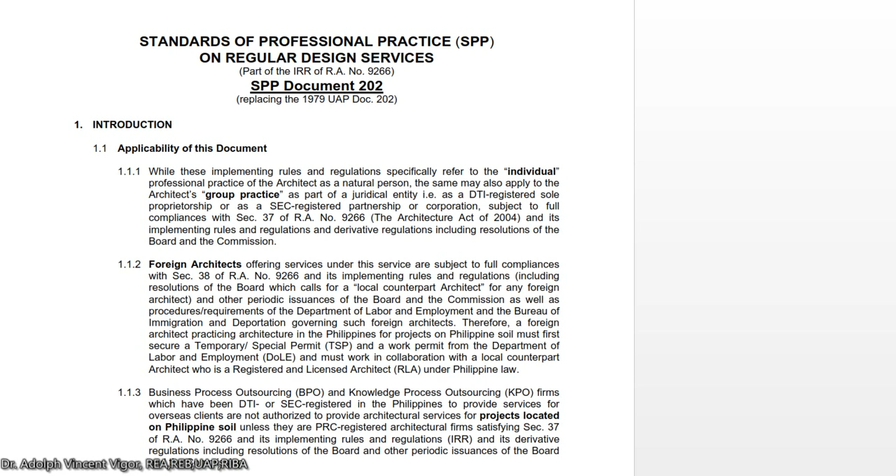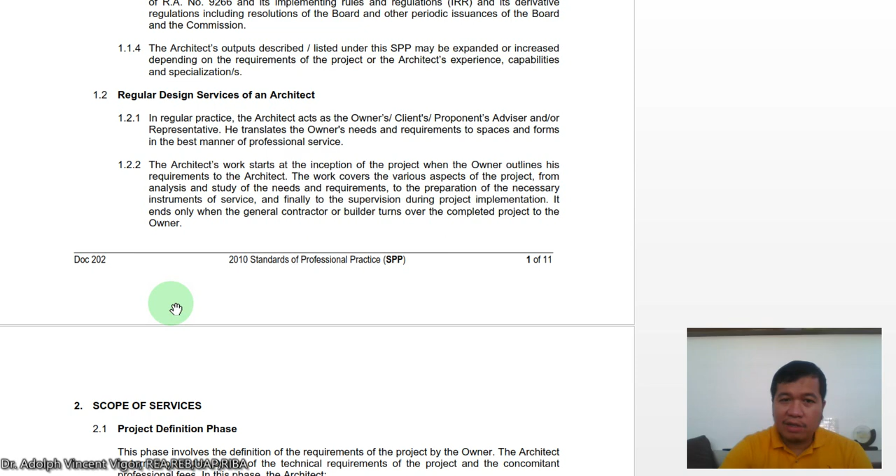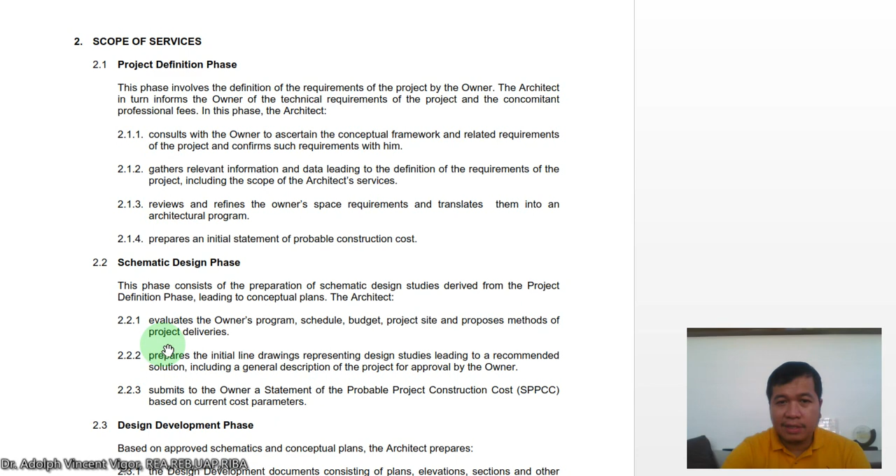Last week we discussed an introduction about SPP Document 202. We talked about the applicability of this document, so the regular design services of an architect, the scope of services, including the project definition phase, schematic design phase, the design development phase, the contract document phase, the bidding or negotiation phase, and the construction phase.

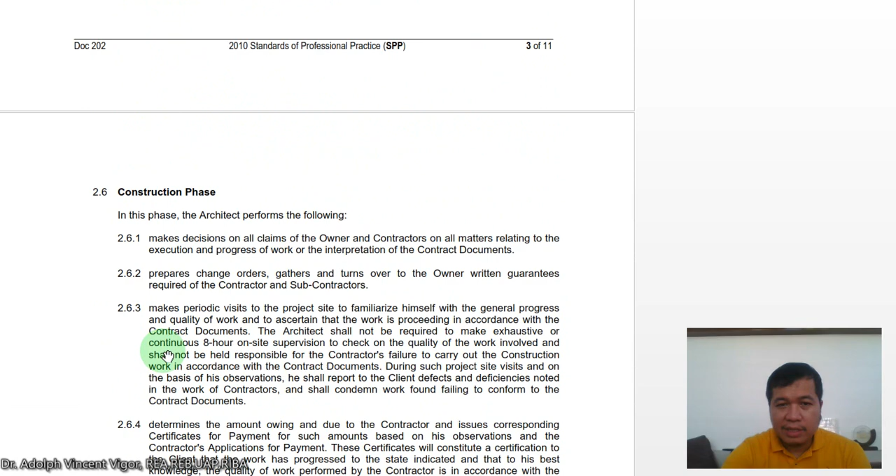Now let's look into the manner of providing services. There are two ways by which an architect may enter into a contract with the owner as the lead professional while working with other professionals in the engineering and allied professions. The first is with a single contract between the architect and the owner, and sub-consultancy contracts between the architect and the other professionals working with the architect.

So this means there's only a single contract between the architect and the owner. Then the architect has sub-consultancy contracts with other professionals that will be working with you. Then we have the architect and the engineering and allied professionals executing separate contracts with the owner.

So let's review. The first way is a single contract only between the architect and the client, but the architect has several contracts with the other allied professions. Another way is that the owner enters into multiple contracts with the architect and different allied professionals in the fields. So in both cases, the professional responsibilities and civil liabilities of each state-regulated professional remain separate.

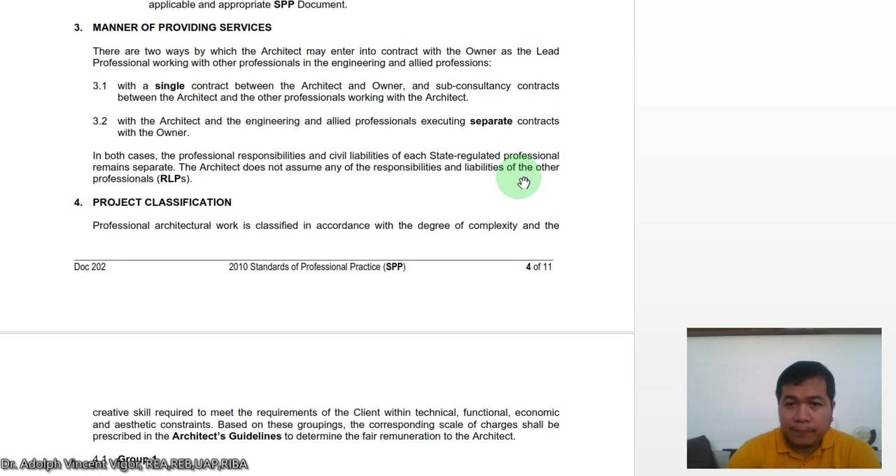Now let's look into project classification. Professional architectural work is classified in accordance with the degree of complexity and the creative skill required to meet the requirements of the client within technical, functional, economic, and aesthetic constraints.

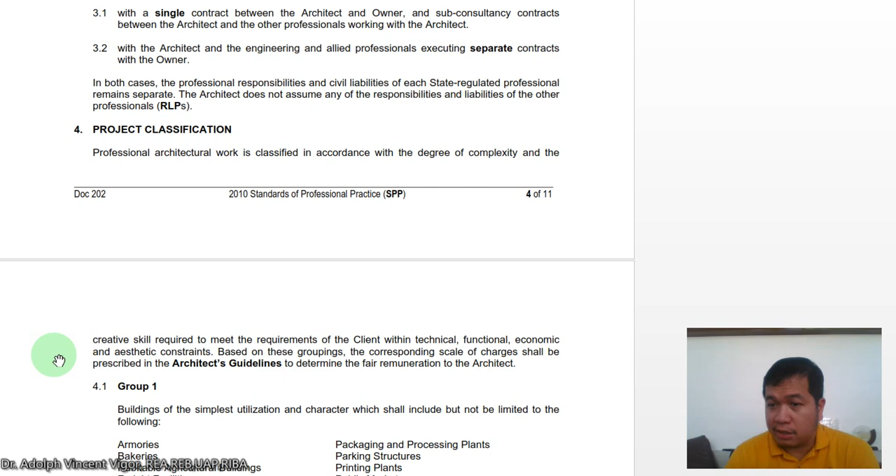Based on these groupings, their corresponding scale of charges shall be prescribed in the architect's guidelines to determine the fair remuneration to the architect. So the keyword here, guys, is fair remuneration. When you think about it, projects are not the same. Some projects could be quite simple, but others could be quite complex and technical in nature. That's why these guidelines were established.

So let's look into group 1, which are the buildings of simplest utilization and character. These are the armories, the bakeries, the habitable agricultural buildings, freight facilities. We also have hangars, industrial buildings, manufacturing or industrial plants, packaging and processing plants, parking structures, printing plants, public markets, service garages, and simple loft-type buildings and warehouses. So these are the classifications here in Group 1.

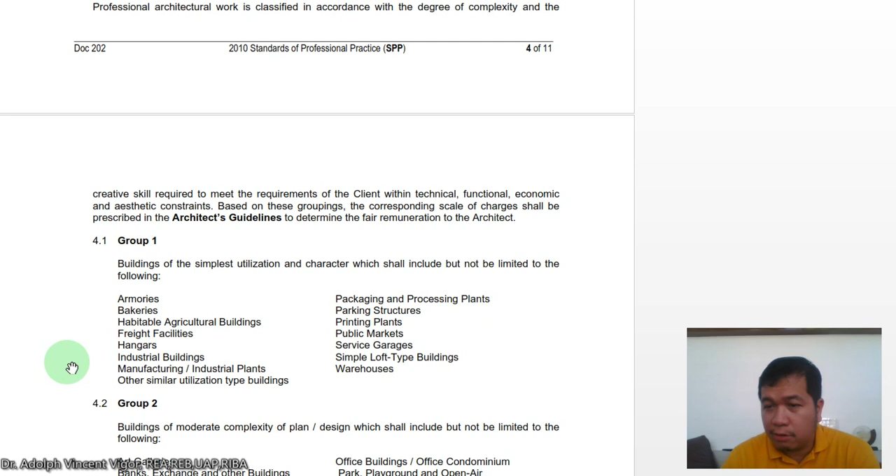It doesn't mean, guys, that manufacturing or industrial plants are simple. It just means that our involvement in this type of structures is just simple, compared probably to the mechanical engineers who will be doing the design of the machineries.

Then we also have here group 2. These are buildings of moderate complexity of plan and design, which include but are not limited to the following: art galleries, banks exchange and other buildings, financial institutions.

Bowladromes, call centers, churches and religious facilities, city town halls and civic centers, college buildings, convents, monasteries, and seminaries, courthouses, halls of justice, dormitories, laundries and cleaning facilities, libraries, malls or mall complexes, motels and apartels, multi-story apartments, nursing homes.

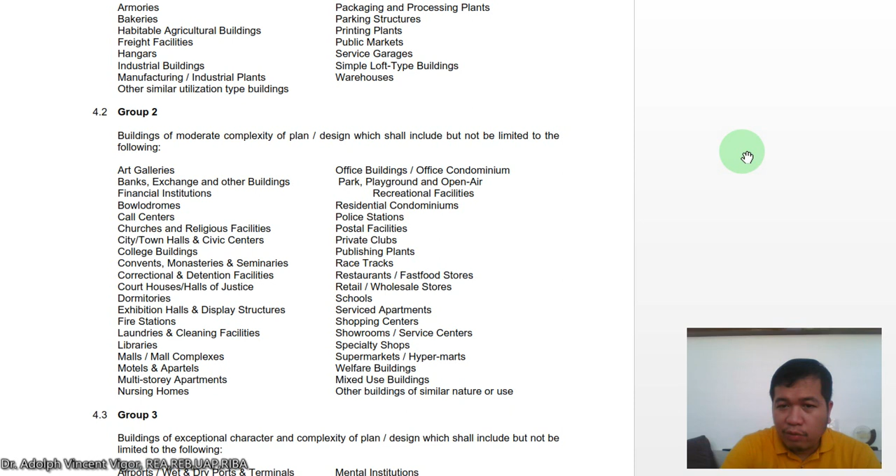We also have office buildings or office condominiums, parks and playgrounds and open-air recreational facilities, residential condominiums, police stations, postal facilities, private clubs, publishing plants, racetracks, restaurants or fast food stores, retail or wholesale stores, schools, service apartments, shopping centers, showrooms or service centers, specialty shops, supermarkets or hypermarts, welfare buildings, mixed-use buildings, or other buildings of similar nature or use.

And we also have Group 3, which is the buildings of exceptional character and complexity of plan or design, which shall include but not be limited to the following. So when you're already talking about buildings of exceptional character, usually these are done by large firms already.

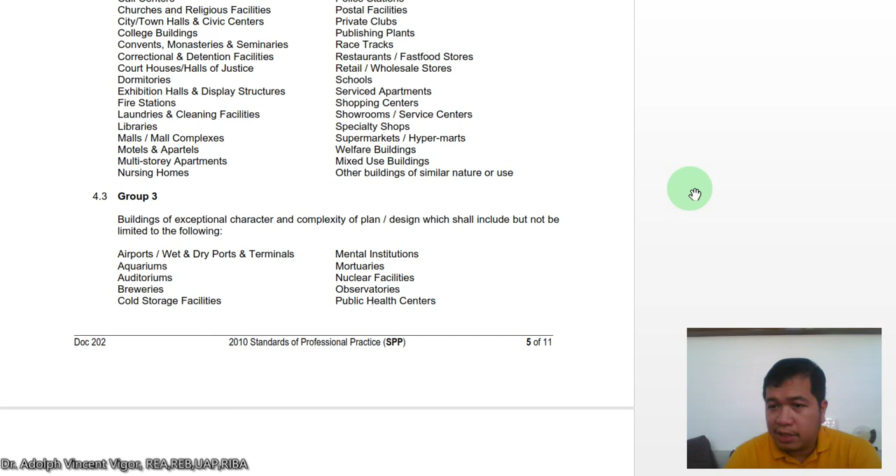So we have airports, wet and dry ports and terminals, aquariums, auditoriums, breweries, cold storage facilities, mental institutions, mortuaries, nuclear facilities, observatories, and public health centers.

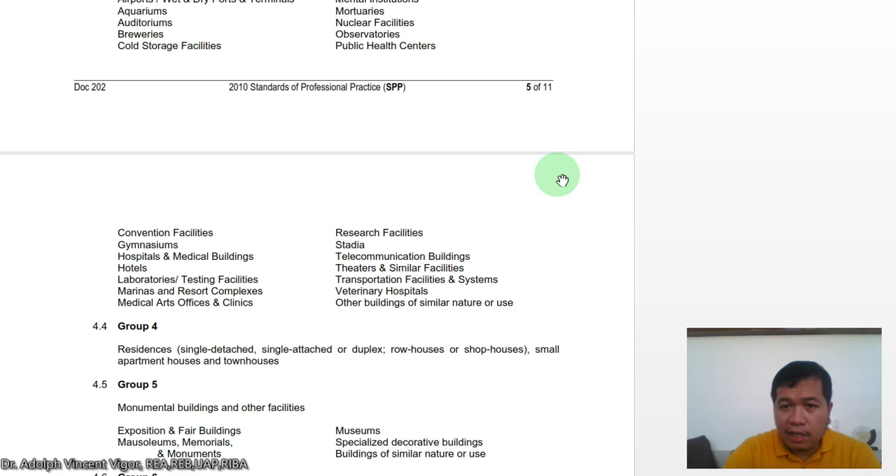We also have convention facilities, gymnasiums, hospitals and medical buildings, hotels, laboratories or testing facilities, marinas and resort complexes, medical arts offices and clinics, research facilities, stadia, telecommunication buildings, theaters and similar facilities, transportation facilities and systems, veterinary hospitals, and other buildings of similar nature or use.

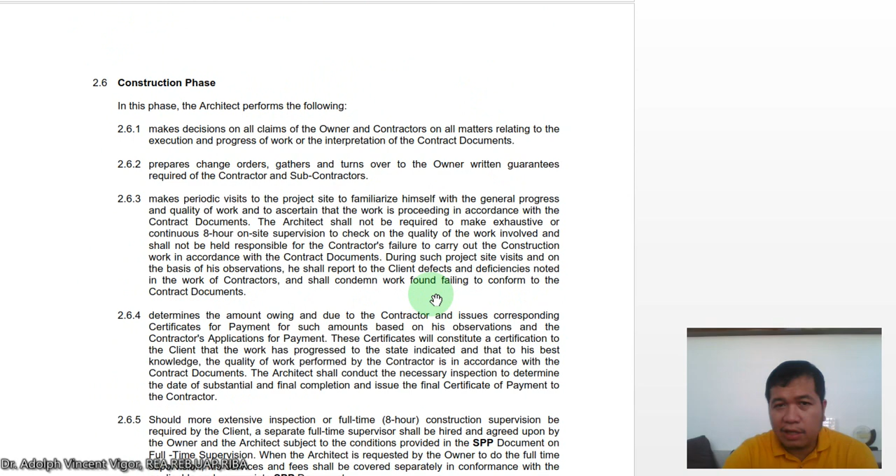So, I think it's easier to familiarize this class if you think about it. When you talk about group 1, it's simple. Group 2, this is the moderate. And group 3, these are the extremely complex projects.

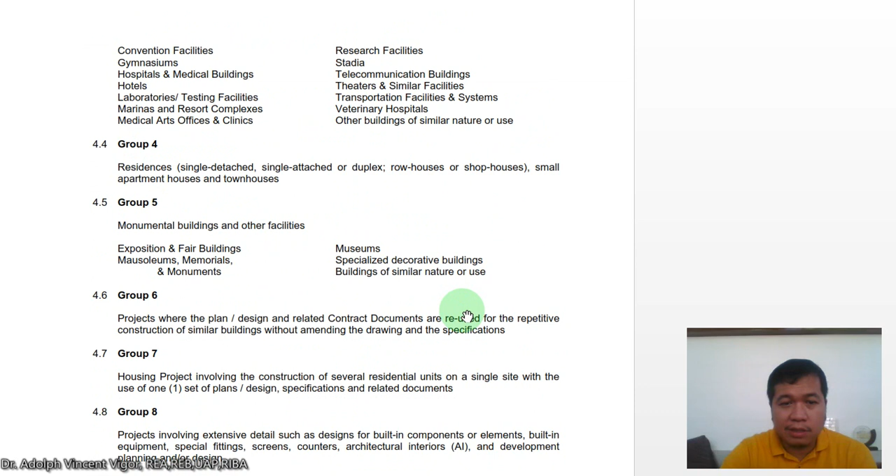Okay, then we go into group 4, these are just the residences. So when you talk about residences, we have the single detached or duplex, row houses or shop houses, small apartment houses and townhouses. Single detached meaning the house is not connected to a firewall. And you have here duplex, row houses, or shop houses.

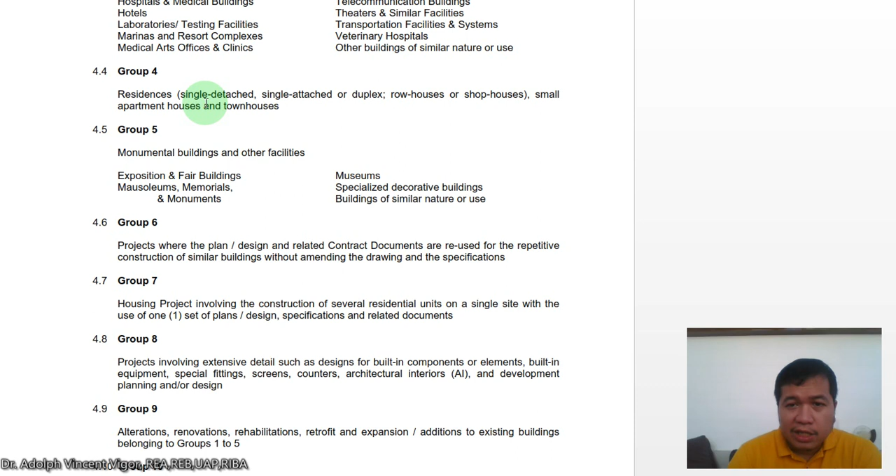So these are the residences. Then we have here group 5, which are the monumental buildings and other facilities. So these are expositions and fair buildings, mausoleums, memorials and monuments, museums, specialized decorative buildings, buildings of similar nature or use.

Then we have here group 6. Group 6 is projects where the plan, design, and related contract documents are re-used for the repetitive construction of similar buildings without amending the drawing and the specifications. So it's just a repeat. The keyword there is that the building is going to be built repeatedly.

Then we have here group 7. Group 7 are housing projects, which involve the construction of several residential units on a single site with the use of one set of plans, design specifications, and related documents. The keyword here is it just uses one set of plans already for the entire drawings for the houses.

Then we have group 8. These are projects which involve extensive details such as design for built-in components or elements, built-in equipment, special fittings, screens, counters, architectural interiors, and development planning and or design.

Then group 9, alterations, renovations, rehabilitations, retrofit and expansion and additions to existing buildings belonging to groups 1 to 5.

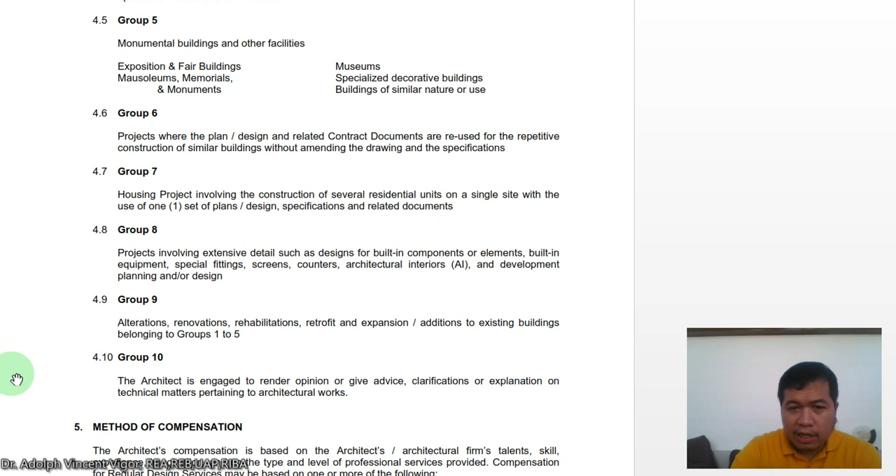Then you have here group 10. So the architect is engaged to render opinion or give advice, clarifications, or explanation on technical matters pertaining to architectural works. So this is related more to consultancy.

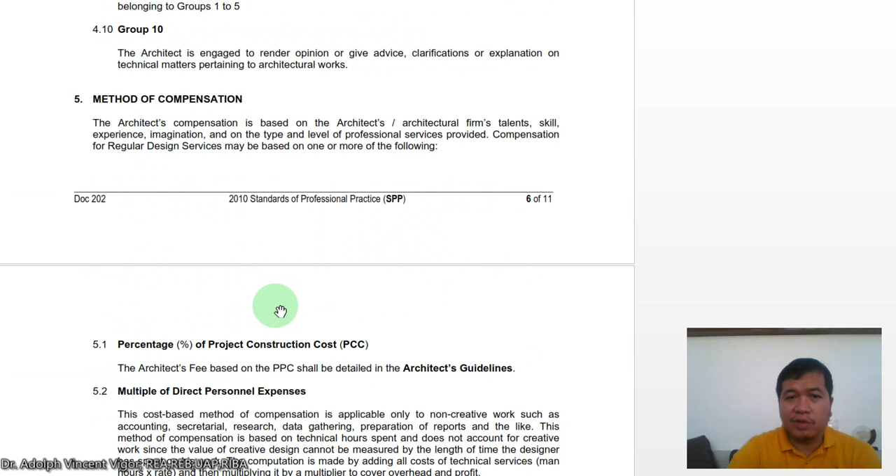Okay, let's look into the methods of compensation. So the architect's compensation is based on the architect's or architectural firm's talents, skill, experience, imagination, and the type and level of professional service provided.

Compensation for regular design services will be based on the following, which is what's written below. So these are just the minimum, guys. Basically, your compensation has a minimum set of recommended fees, but it also depends on the reputation of your firm, how established your firm is, or how established your reputation is as an architect.

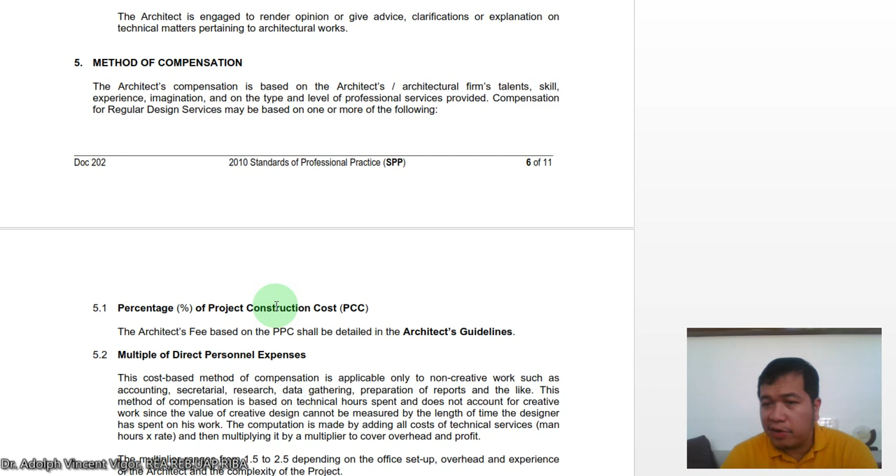So if you already have built several projects of the same nature, you already have the reputation for it. Then, if, for example, you also have a master's degree or doctorate in a certain field, it could also dictate how you're going to be paid. So these are just the minimum, guys.

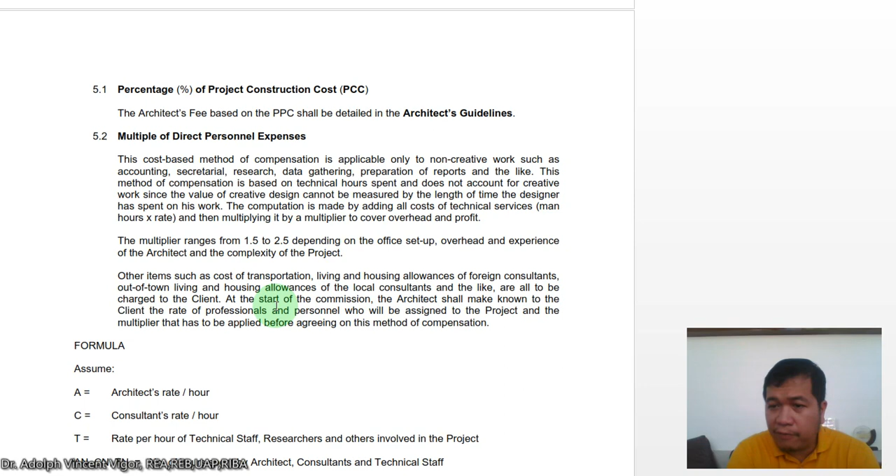So you could be paid based on the architect's fee or based on percentage. So the architect's fee based on the PPC shall be based on the architect's guidelines. I'm going to show you that later, the different percentages for each project type.

Then we have here the multiple of direct personnel expense. This cost-based method of compensation is applicable only to non-creative work such as accounting, secretarial, research, data gathering, preparation of reports, and the like. This method of compensation is based on technical hours and does not account for creative work since the value of creative design cannot be measured by the length of time the designer has spent on his work.

Well, that's an important phrase, guys, especially when you are talking with your clients. So the computation is made by adding all costs of technical services, and then you're just going to have a multiplier for it. The multiplier ranges from 1.5 to 2.5 depending on your setup of your office, the overhead and experience of the architect, and the complexity of the project.

So other items such as cost of transportation, living and housing allowances of foreign consultants, out of town living and housing allowances of the local consultants and the like are all to be charged to the client.

So at the start of the commission, the architect shall make known to the client the rate of professionals and personnel who will be assigned to the project and the multiplier that has to be applied before agreeing on this method of compensation. So transparency is really important with this one.

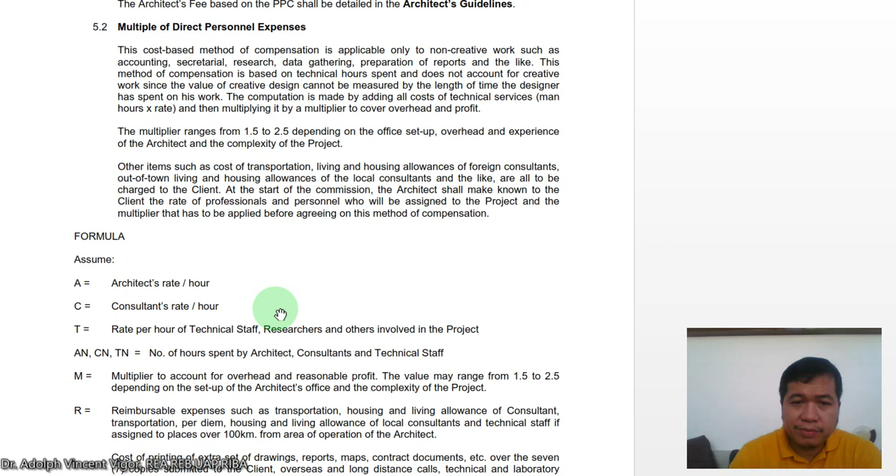So I think this is the formula. A is the architect's hour, C is the consultant's rate per hour, T is the rate per hour of the staff. So AN, CN, or TN, that's the number of hours spent by the architect, consultants, and technical staff.

So M is the multiplier. Then R is the reimbursable expenses. It's talking about the transportation, housing, living allowances, and the per diem, especially if you're going to be assigned to places more than 100 kilometers from your area of operation, and the cost of printing also.

So first, you're going to determine the direct cost. You're going to determine that by multiplying the rate per hour of the architect, the consultant, and the technical staff by the number of hours they have worked on a certain project. Then with that, you already have the direct cost.

After you get the direct cost, you're going to get your fee by multiplying the direct cost with a multiplier. That's 1.5 to 2.5, depending on what you agreed with the client. Then the total cost of service to the client should be your fee plus R, which is the reimbursable expense.

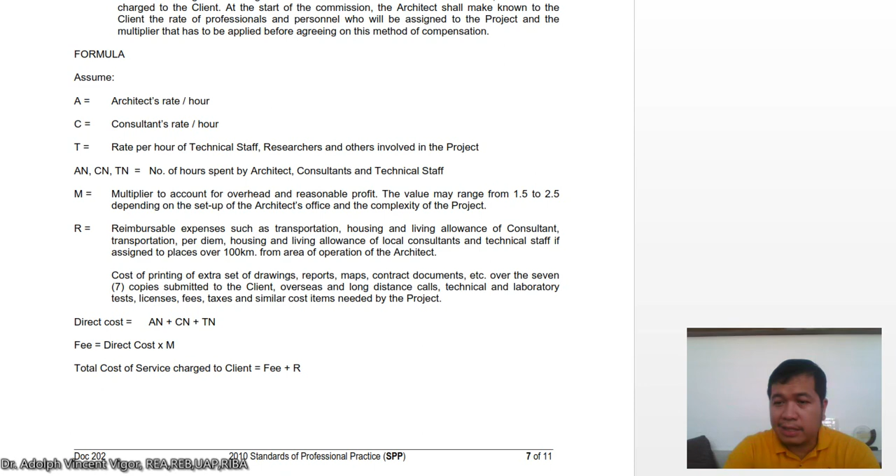So it's just basic mathematics, guys. We just really have to be familiar with this so that when you practice, you could explain it well to your clients before working on a project.

So we have here also professional fee plus expenses. This method of compensation is frequently used where there is a continuing relationship involving a series of projects. So it establishes a fixed sum over and above the reimbursement for the architect's technical time and overhead. So an agreement on the general scope of the work is necessary in order to set an equitable fee.

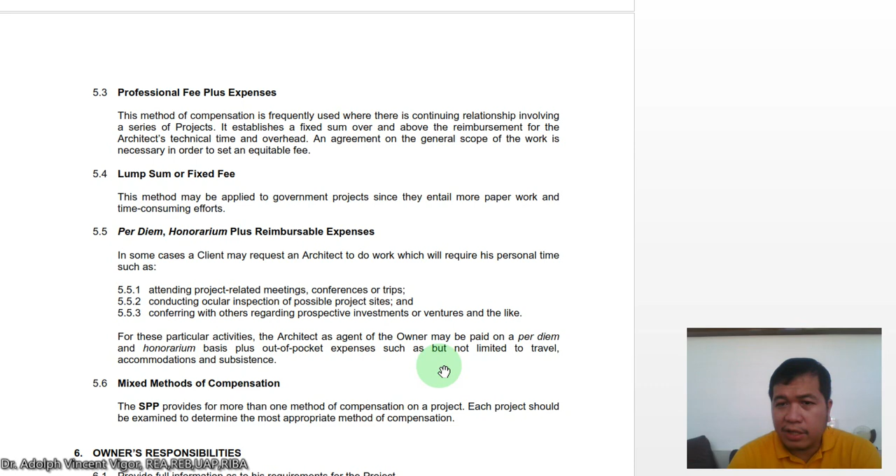We also have the lump sum. This method may be applied to government projects since they entail more paperwork and time-consuming efforts.

Then we also have the per diem, the honorarium plus reimbursable expenses. In some cases, a client may request an architect to do work which will require his personal time, such as one, attending project-related meetings; two, conducting ocular inspection of possible project sites; and three, conferring with others regarding prospective investments or ventures.

For these particular activities, the architect as agent of the owner may be paid on a per diem and honorarium plus out-of-pocket expenses such as but not limited to travel, accommodations, and subsistence.

And we also have the mixed methods of compensation. So the SPP provides for more than one method of compensation for a project. So each project should be examined to determine the most appropriate method of compensation.

This is so because projects differ, guys, from one another because no project is the same. Each project is unique. It's a unique undertaking because it relies on several factors: location, topography, and climatic factors, political factors also. So there's a lot of things to be considered. That's why it is allowed to have a mixed type of compensation for different types of projects.

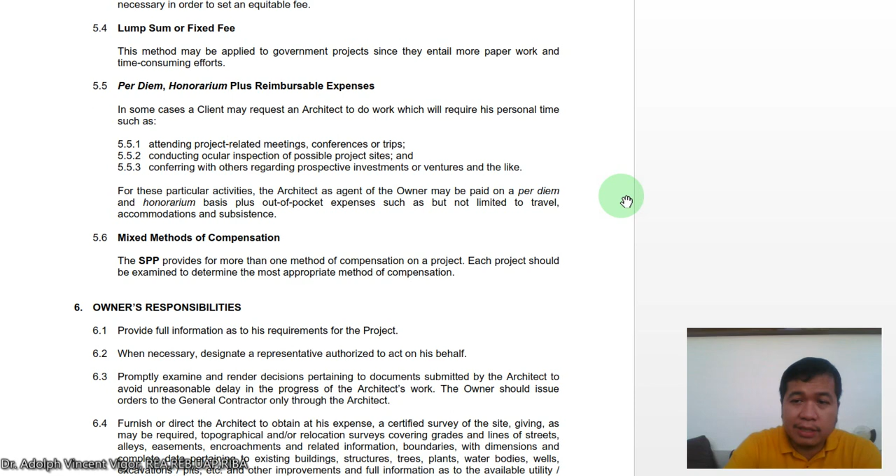Aside from the responsibilities of the architect, the owner also has responsibilities. One of the responsibilities of the owner is to provide full information as to his requirements for the project. So the owner should be able to give you everything.

It is important that the owner really explains to you what his requirements are for the project so that you'll be able to make a design based on his needs. So you should learn, guys, how to probe the owner so that you'll determine what he really wants. So when necessary, designate a representative authorized to act on his behalf.

So that's another responsibility of the owner. Especially if the owner is overseas or traveling, the owner should designate someone.

The next is to promptly examine and render decisions pertaining to documents submitted by the architect to avoid unreasonable delay in the progress of the architect's work.

The owner should issue orders to the general contractor only through the architect. So the owner should not go directly to the general contractor because the owner is a layman. The owner should contact his architect first, and then the architect will relay that to the general contractor.

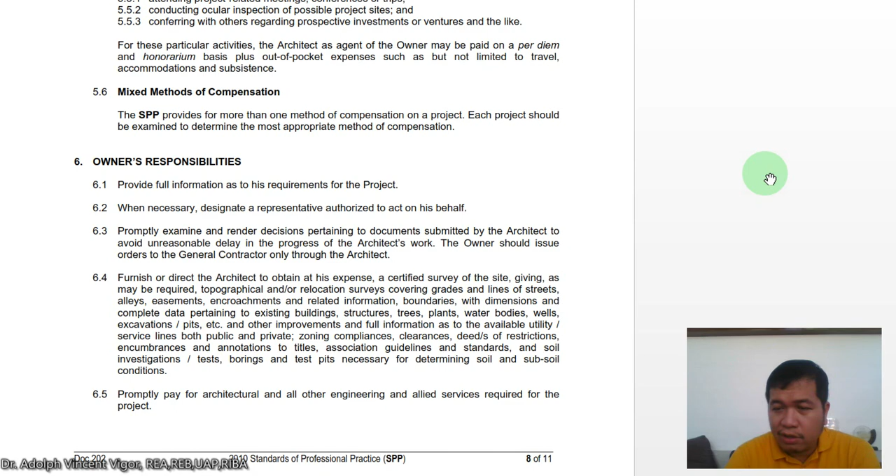And then, to promptly pay for architectural and all engineering and allied services required by the project. So, of course, it's the owner's responsibility to pay for the services for the project.

It's also the owner's responsibility to pay for design and consulting services on acoustics, communications, electronics, and other specialty systems required by the project. It's also the owner's responsibility to arrange and pay for legal, auditing, insurance, counseling, and other services as may be required, and to pay for all reimbursable expenses incurred.

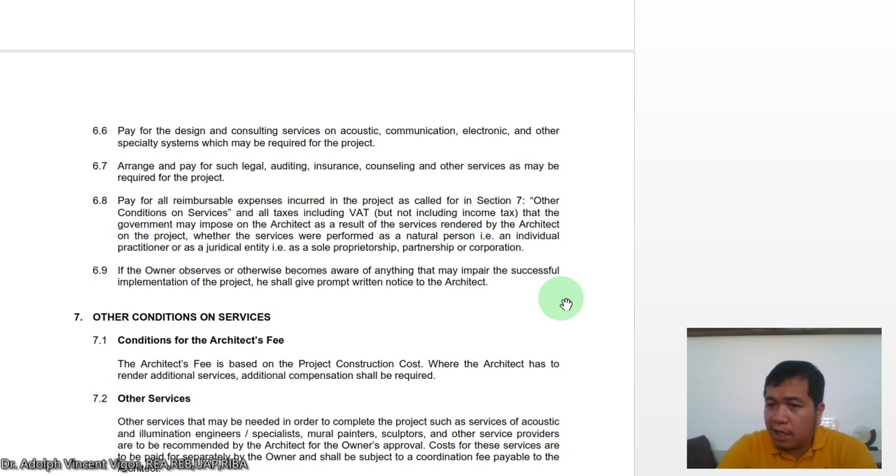If the owner observes or otherwise becomes aware of anything that may impair the successful implementation of the project, he shall promptly give written notice to the architect. It's really important that the owner is transparent with regards to the project being designed and built. So we have here other conditions on the services.

We have here the conditions for the architect's fee. The architect's fee is based on the project construction cost. When the architect has to render additional service, additional compensation shall be required.

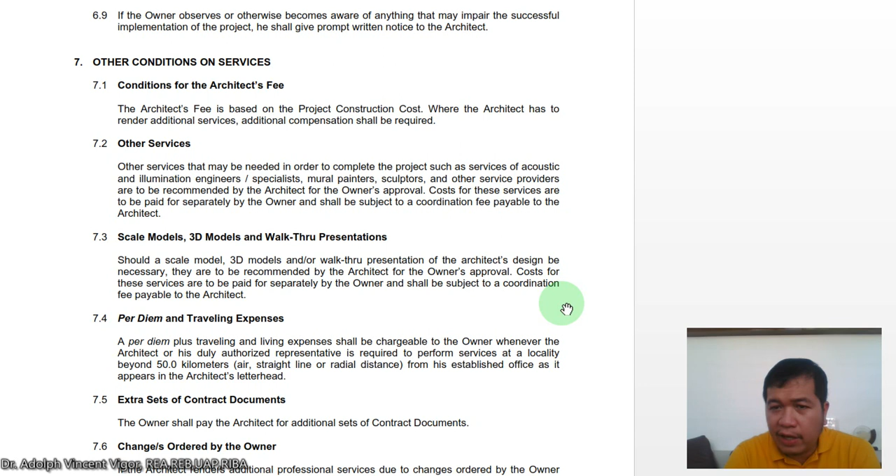If you are required by the owner to do other services, you're going to be paid for it. Other services needed to complete the project, such as services of acoustic and illumination engineers, specialists, mural painters, sculptors, and other providers, are to be recommended by the architect for the owner's approval. Costs for these services are to be paid separately by the owner and shall be subject to a coordination fee payable to the architect.

Then we have scale models, 3D models, and walkthrough presentations. Should a scale model, 3D model, or walkthrough presentation of the architect's design be necessary, they are to be recommended by the architect for the owner's approval. Costs for these services are to be paid separately by the owner and shall be subject to a coordination fee payable to the architect.

For per diem and traveling expense, if it's going to be beyond 50 kilometers, per diem traveling and living expenses shall be chargeable to the owner whenever the architect or his duly authorized representative is required to perform services at a locality beyond 50 kilometers, by air, straight line, the radial distance from his established office as it appears in the architect's letterhead.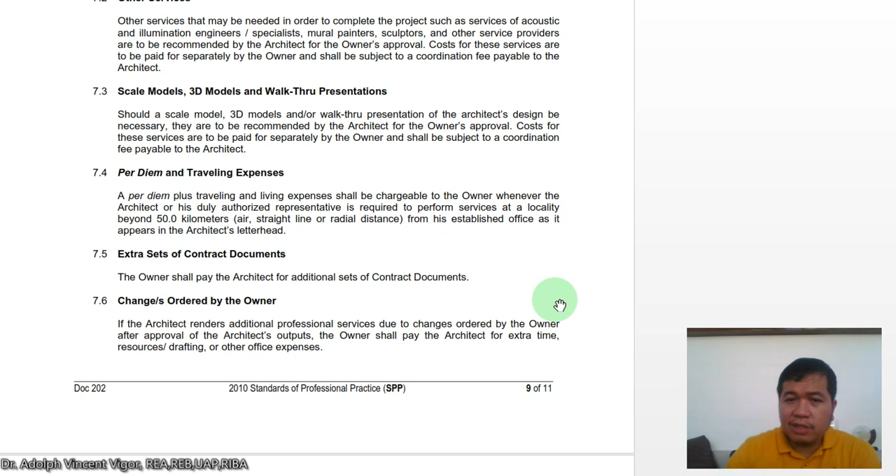So you have extra sets of contract documents. The owner shall pay for additional sets of contract documents.

Another clause is for changes ordered by the owner. If the architect renders additional professional service due to changes ordered by the owner after approval of the architect's outputs, the owner shall pay the architect for extra time, resources, drafting, or any other office expenses.

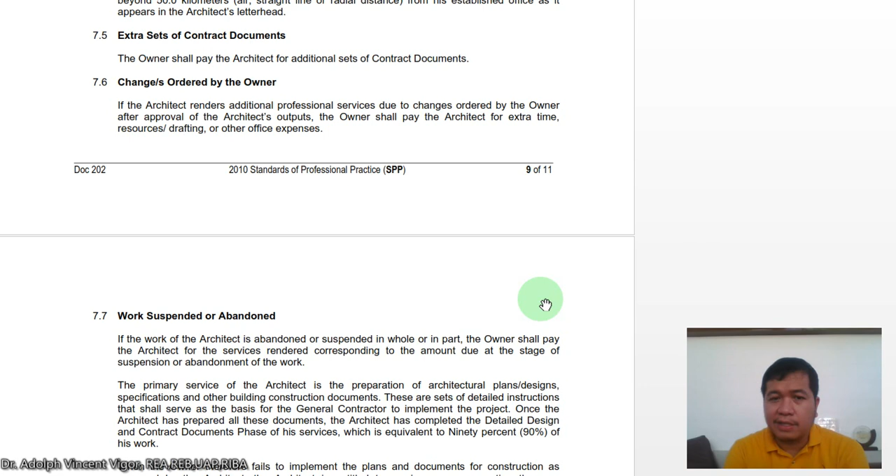There's another condition here about work suspended or abandoned. This is an important legal clause, guys, hope you remember this. If the work of the architect is suspended in part or in whole, the owner shall pay the architect for the services rendered corresponding to the amount due at the stage of suspension or abandonment of work.

The primary service of the architect is the preparation of architectural designs, plans, specifications, and other building construction documents. These are sets of detailed instructions that shall serve as the basis for the general contractor to implement the project. Once the architect has prepared all these documents, the architect has completed the detailed design and contract documents phase of his services, which is equivalent to 90% of his work.

So when the owner fails to implement the plans and documents for construction as prepared by the architect, the architect is entitled to receive compensation in the sum of 90% of the architect's fee.

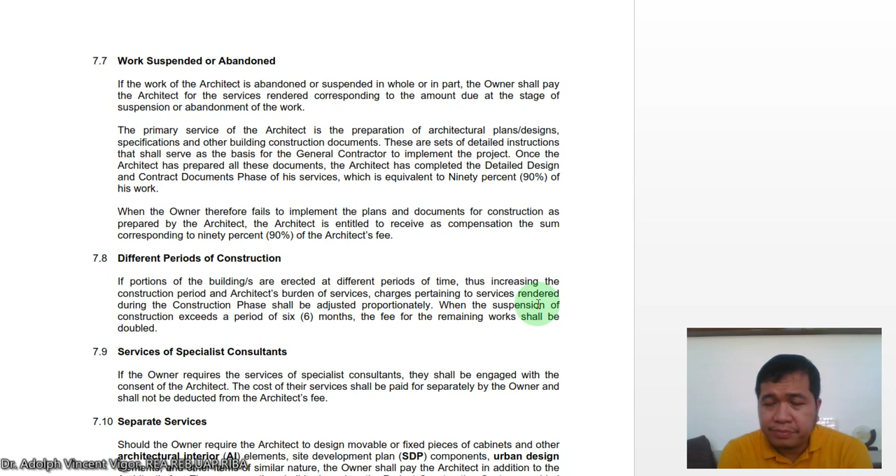Then we also have a clause for different periods of construction. If portions of the buildings are erected at different periods of time, thus increasing the construction period and the burden of the architect's services, charges pertaining to services rendered during the construction phase shall be adjusted proportionately. However, when the suspension of construction exceeds more than 6 months, the fee for the remaining works shall be doubled.

Now the services of specialist consultants. If the owner requires the services of specialist consultants, they shall be engaged with the consent of the architect. The cost of their services shall be paid for separately by the owner and shall not be deducted from the architect's fee.

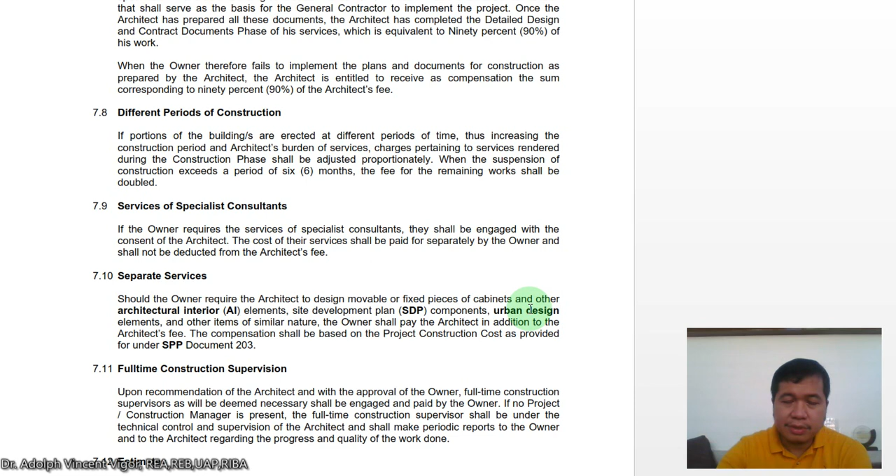Then we have separate services. Should the owner require the architect to design movable or fixed pieces of cabinets and other architectural interior elements, site development plan components, urban design elements, and other items of similar nature, the owner shall pay the architect in addition to the architect's fee. The compensation shall be based on the project construction cost as provided for under SPP Document 203.

Then for full-time construction supervision, upon recommendation of the architect and approval of the owner, full-time construction supervisors as well will be deemed necessary shall be engaged and paid by the owner. If no project construction manager is present, the full-time construction supervisor shall be under the technical control and supervision of the architect and shall make periodic reports to the owner and to the architect regarding the progress and quality of the work done.

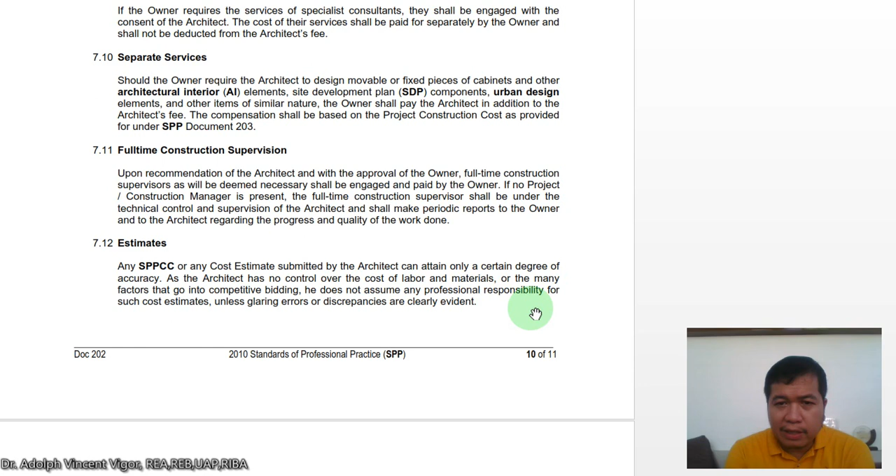Then for estimates, any statement of probable construction cost or SPPCC, or any cost estimate submitted by the architect, can only attain a certain degree of accuracy. So the architect has no control over the cost of labor or materials or the many factors that go into competitive bidding. It does not assume any professional responsibility for such cost estimates unless the errors are glaring or discrepancies are clearly evident.

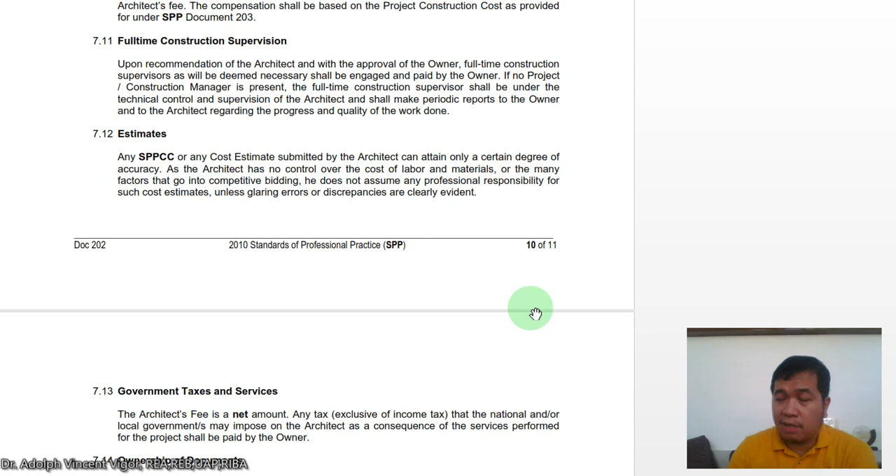So when it comes to government taxes and services, it's important to remember guys that the architect's fee is a net amount. Any tax, exclusive of income tax, that a national or local government may impose on the architect as a consequence of the service performed for the project shall be paid by the owner.

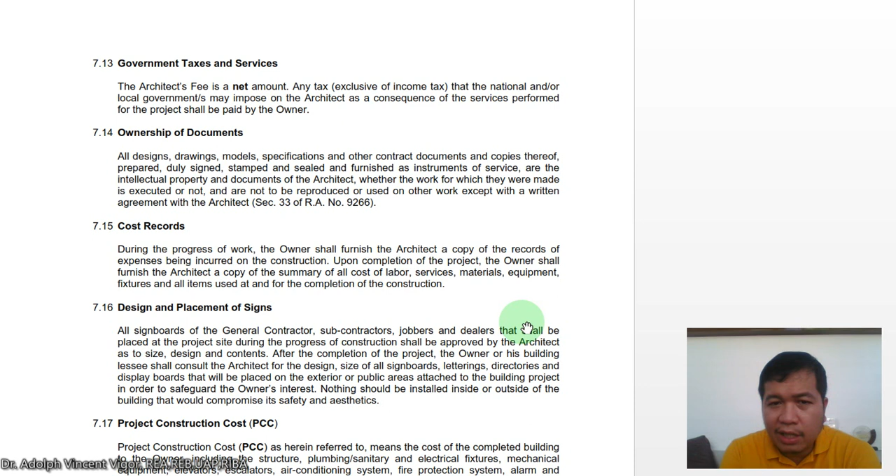Then for the ownership of documents, I think this is what we usually put in our blueprints. All designs, drawings, models, specifications, and other contract documents and copies thereof, prepared, duly signed, stamped, and sealed, and furnished as instruments of service, are the intellectual property and documents of the architect. So whether the work for which they were made is executed or not, they are not to be reproduced or used on other work except with a written agreement with the architect. So that's section 33 of RA 9266.

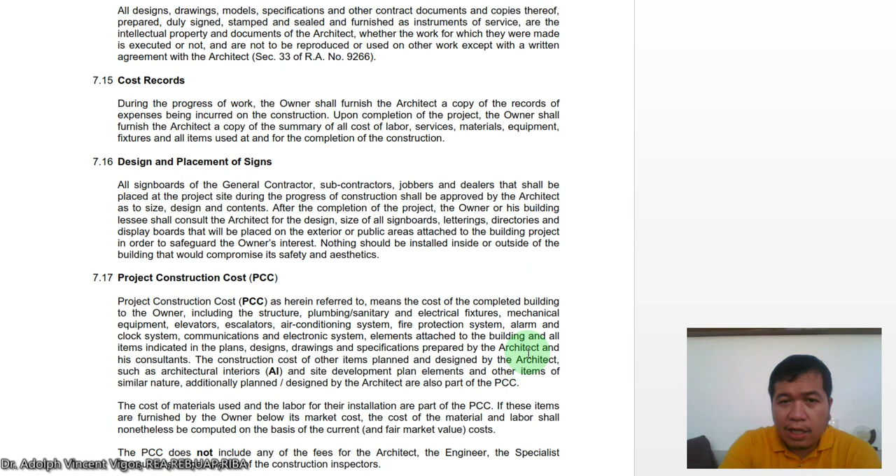Then we have another one for cost records. During the course of work, the owner shall furnish the architect a copy of the records of expenses being incurred on the construction. Upon completion of the project, the owner shall furnish the architect a copy of a summary of the cost of labor, materials, equipment, fixtures, and all items used for the completion of the construction.

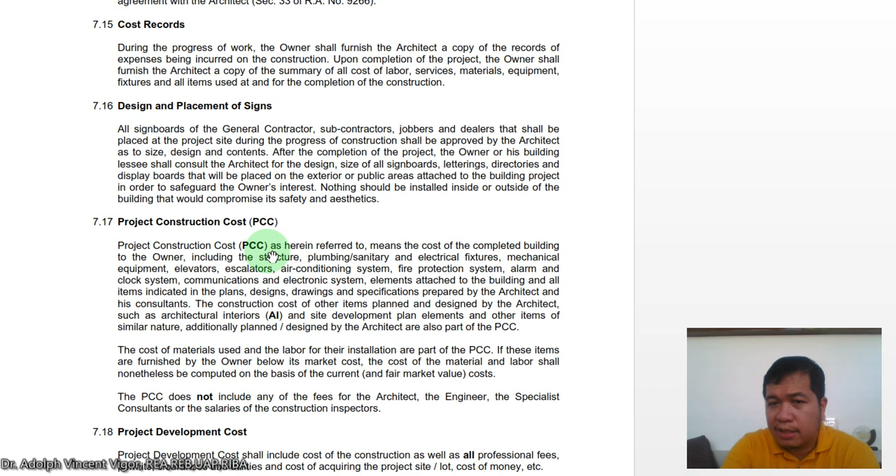For design and placement of signs, all signboards of the general contractor, subcontractor, jobbers, and dealers that shall be placed at the project site during the progress of construction shall be approved by the architect as to size, design, and content. So it just means that you're going to approve everything, guys, especially where it's going to be located, its sizes, because you have to safeguard also the interest of the owner.

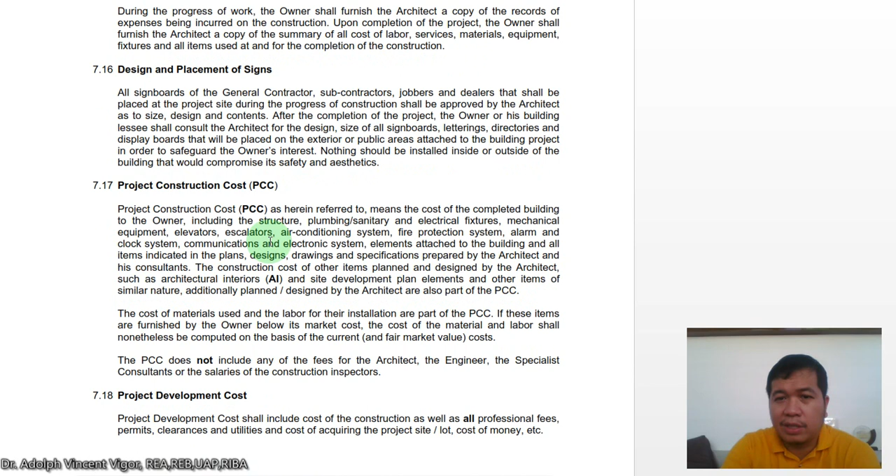Then you have here the project construction cost. The project construction cost referred here means the cost of the completed building to the owner, including the structure, plumbing, sanitary, electrical fixtures, mechanical equipment, elevators, escalators, air conditioning system, fire protection system, alarm and clock system, communications and electronic system, elements attached with the building, and all items indicated in the plans, designs, drawings, and specifications prepared by the architect and his consultant.

So the construction costs of other items planned and designed by the architect, such as architectural interiors and site development plan elements, and other items of similar nature additionally planned or designed by the architect, are also part of the PCC. The cost of materials used and labor for the installation are part of the PCC. So if these items are furnished by the owner below its market cost, the cost of the material and labor shall nonetheless be computed on the basis of the current fair market value cost.

So the PCC does not include any of the fees for the architect, the engineer, specialist, consultants, or salaries of the construction inspectors.

We have here the project development cost. Project development costs include the cost of the construction as well as all professional fees, clearances, utilities, and cost of acquiring the project site. So that's the difference between the project construction cost and the project development cost.

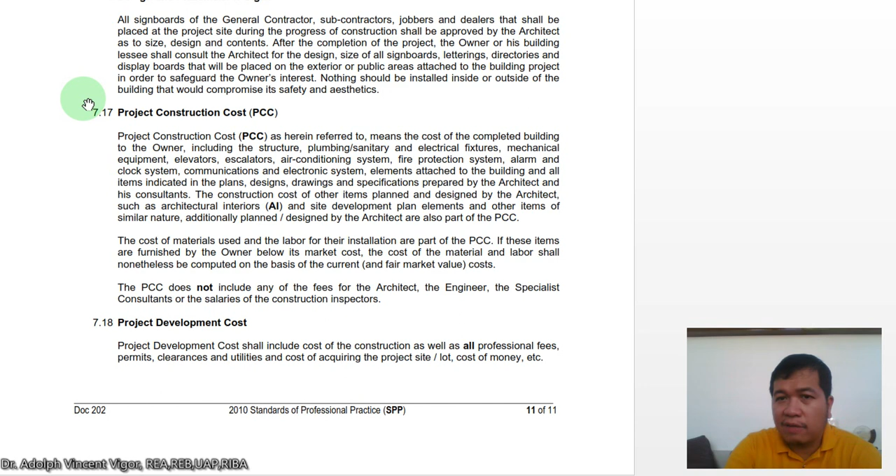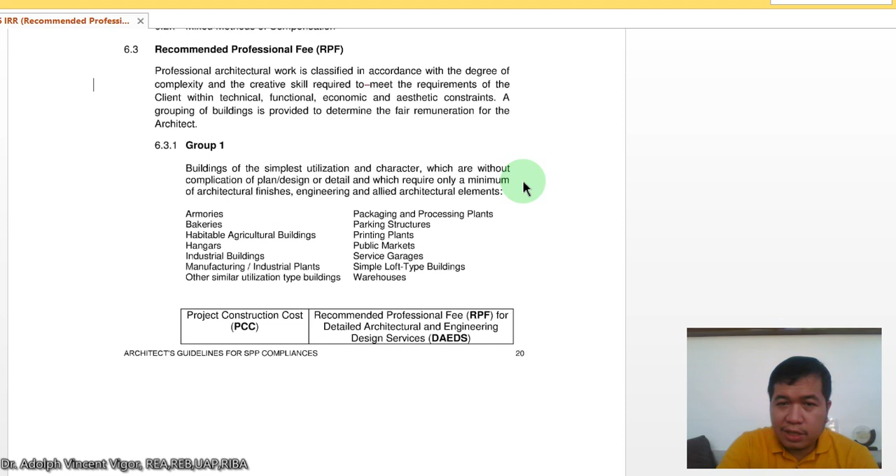Now let's look into the percentage of the recommended professional fees. If you remember, you have group 1, which is the simplest type of structures. So the project, you could do a DAEDS for this, which is the detailed architectural engineering design service. You could do the DADS, or you do architectural design only. So if we're going to include the fees of the other professionals, for simple structures, 50 million or less, your fee is about 5%.

Then if it's 50 to 100 million, that's 2.5 million, then another 4% for the excess. Then if it's 100 to 200 million, that's 4.5 million, then 3% in excess of 100 million. Then for 200 to 500 million, that's 7.5 million plus 2% in excess of 200 million. From 500 million to 1 billion, that's 13.5 million and 1% of the excess of 500 million.

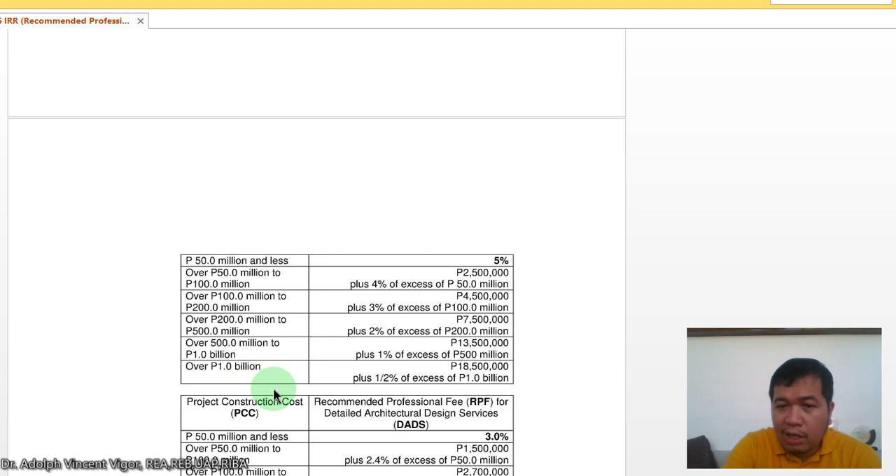Then if it's 1 billion, that's 18.5 million and 0.5% in excess of a billion. So if it's going to be architectural only, your fee is only 3% for simple structures.

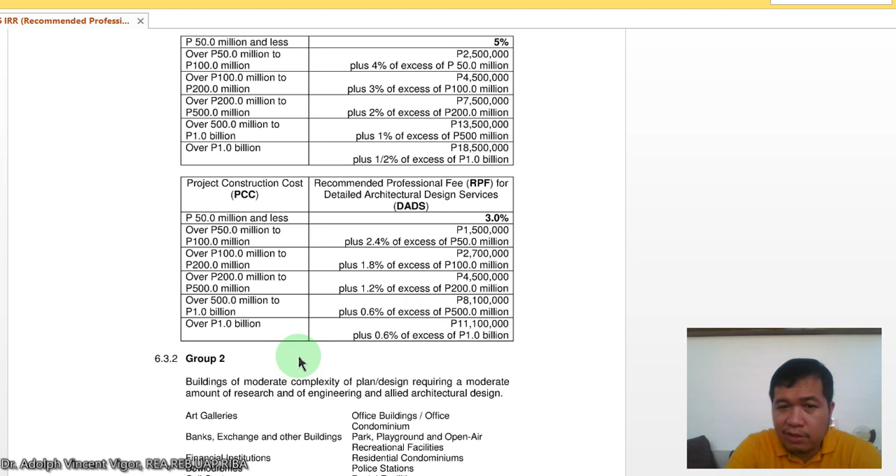If it's 50 million or less, that's 3%. If it's 50 to 100, that's 1.5 plus 2.4. If it's 100 to 200, that's 2.7 plus 1.8 of the excess of 100. If it's 200 to 500, that's 4.5 plus 1.2% in excess of 200. If it's 500 to 1 billion, that's 8.1 plus 0.6% excess of 500 million. If it's over a billion, that's 11.1 plus 0.6% in excess of 1 billion.

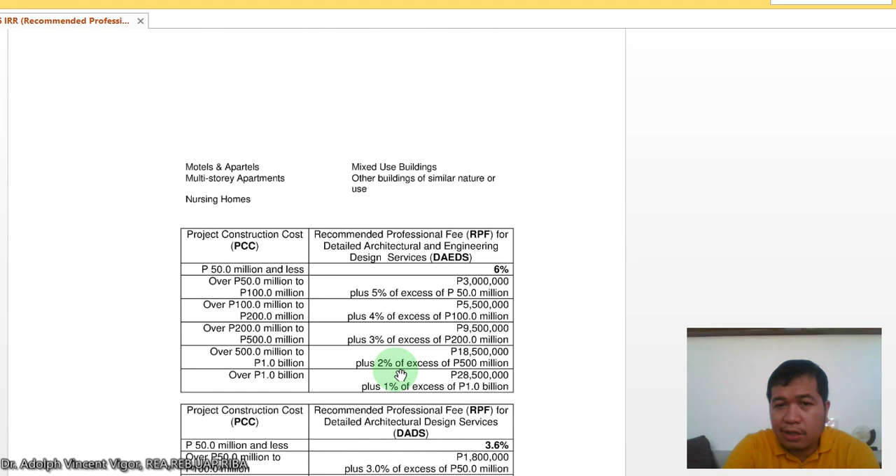So for group 2, sir, for those with moderate character, for the DAEDs, if it's going to include the fees for the other professionals as well, it's going to be 6%. Then it's going to be incremental like this also.

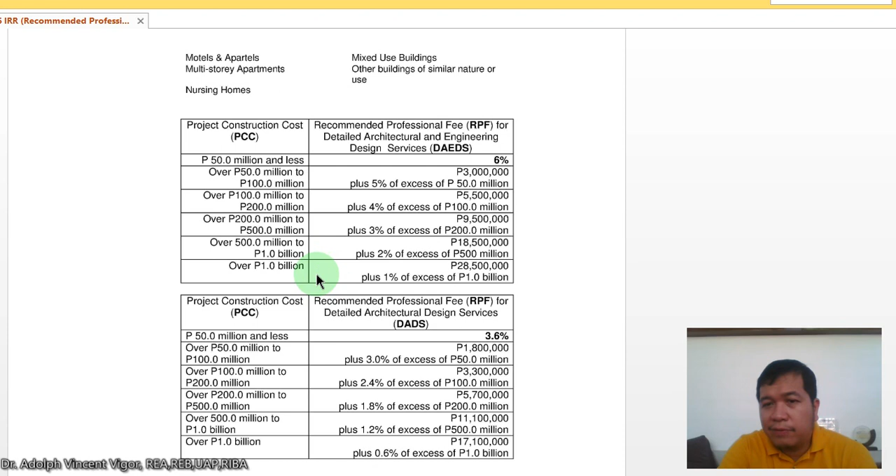So that's 6%. Then if it's 50 to 100, that's 3 million plus 5% in excess. 100 to 200, that's 5.5 plus 4%. So there's a pattern, that's 5, 4, 3, 2, 1, until we reach, if it's over a billion, that's 28.5 plus 1% in excess of a billion.

But if it's only DADS, you're going to do the architecture only, it's only 3.6%. Then it's going to be calibrated here also if its cost becomes higher, the same as this one.

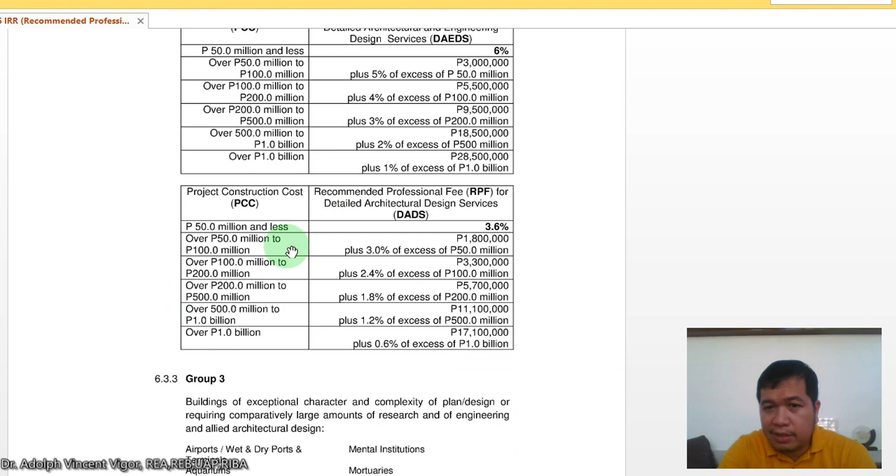Okay, so if it's group 3 for exceptional buildings, your fee is 7%. So if you're going to do everything, you're going to include also the fees for other professionals, which is the DAEDs, it's 7%. It's 50 to 100, that's 3.5, and then 6% of the excess of 50 million.

If it's 100 to 200, that's 6.5 million plus 5% in excess of 100 million. It's 200 to 500, that's 11.5 million plus 4% in excess of 200 million. It's over 500 to 1 billion, that's 23.5 plus 3% in excess of 500 million. If it's over a billion, that's 38.5 plus 2% in excess of a billion.

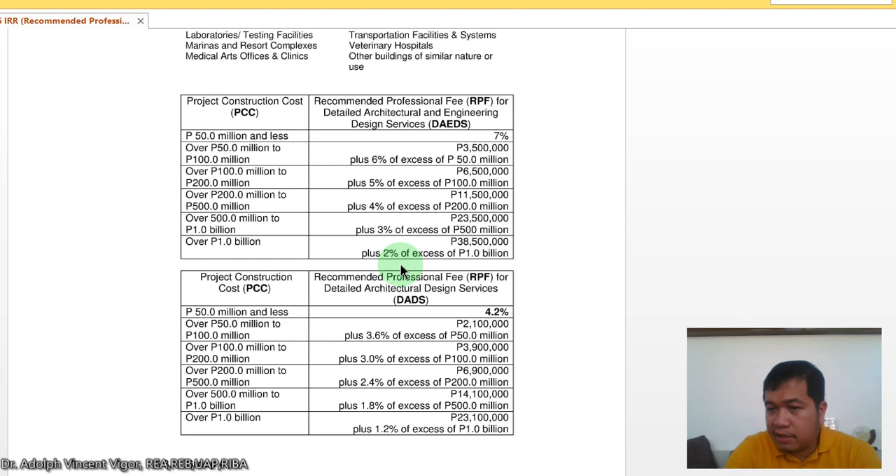If you're going to do the architectural only, that's 4.2%. Then it's going to be calibrated also from 3.6. The pattern is 3.6, 3, 2.4, 1.8, until you reach 1.2% if you're going to 1 billion already.

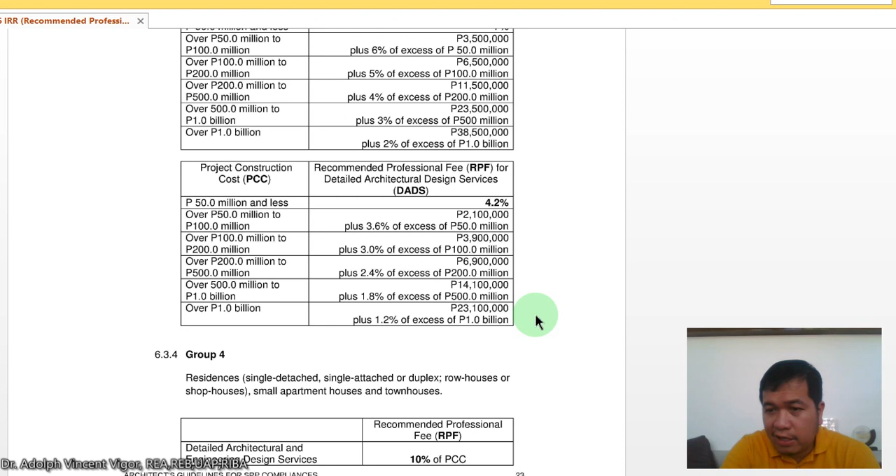So this is a significant sum, guys, already. But your professional fee, it's not something that's net to you. Remember, if you already reach this stage, you already have a very large architectural firm with a lot of overhead.

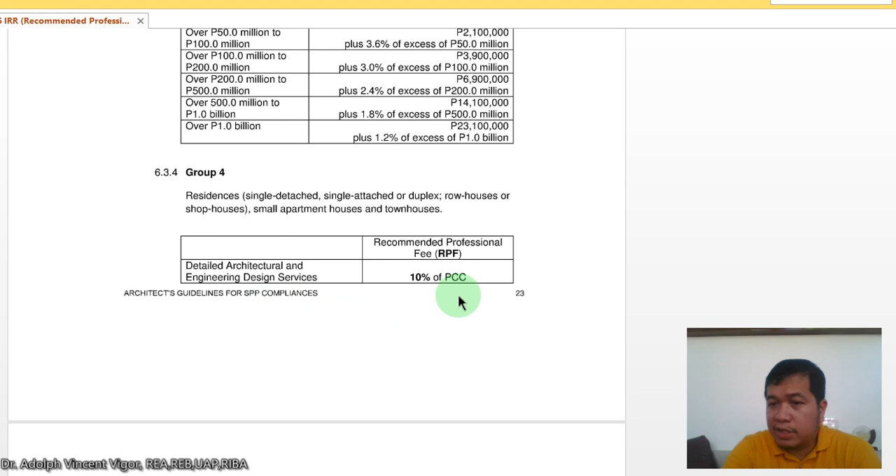So for residences, for the detailed architecture and engineering design service, that's 10%. Then if we're going to work on architectural only, it's 6%.

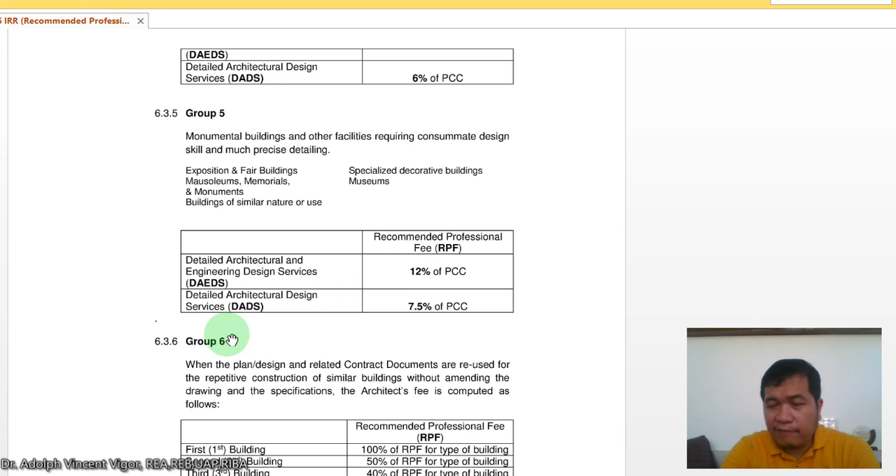So for group 5, we have monumental buildings. For going to include the professional fees of the other allied disciplines, it's 12%. And if we're going to do architectural only, that's 7.5%.

For group 6, these are when the plans, designs, and other related contract documents are used for the repetitive construction of similar buildings without amending the drawings and the specifications. The architect's fee is computed as follows.

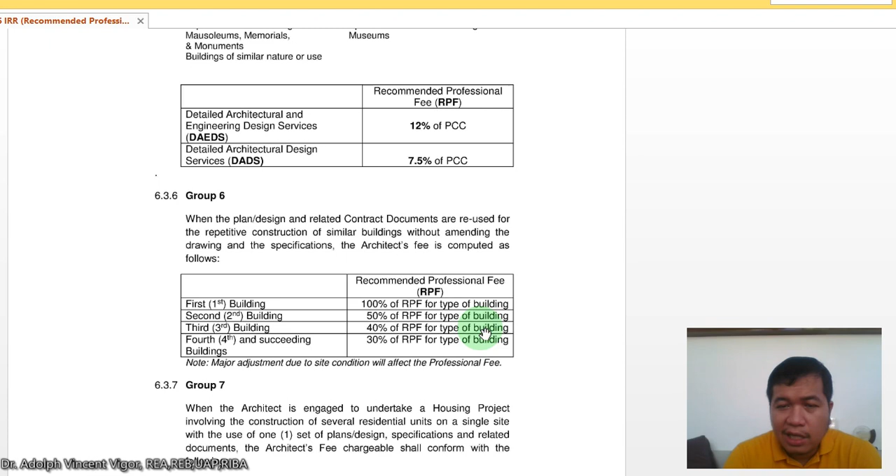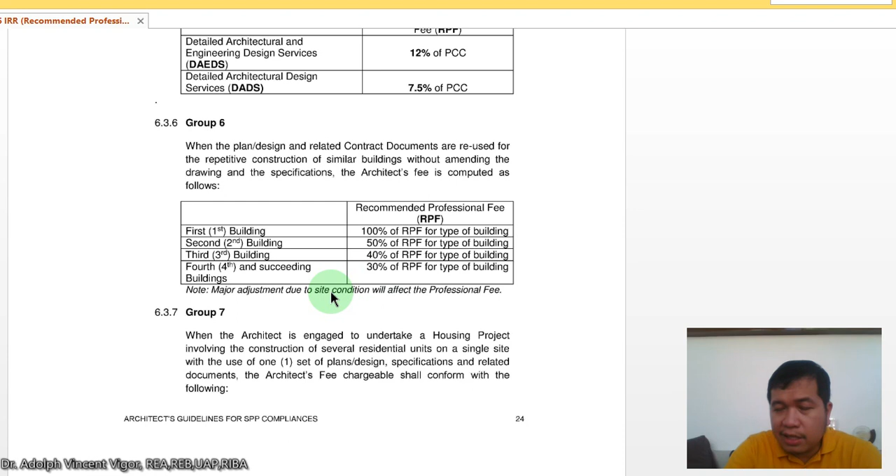So you have the first building is 100% of the recommended professional fee. The second is only 50%. The third is 40%. The fourth and succeeding building is only 30%. So it becomes smaller as it's being repeated.

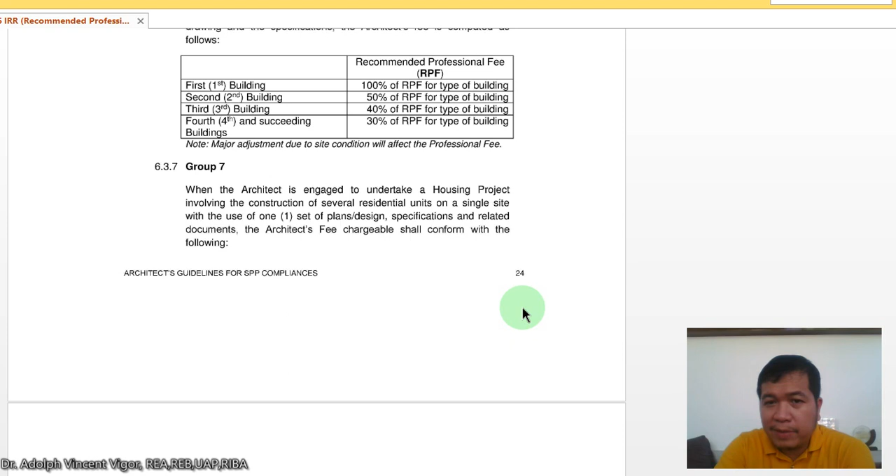So when the architect is engaged to undertake, in group 7, a housing project involving the construction of several residential units in a single site, the use of one set of plans, the architect's fee chargeable is conformed to the following. So it's still 10% to 6%, but there's a calibration.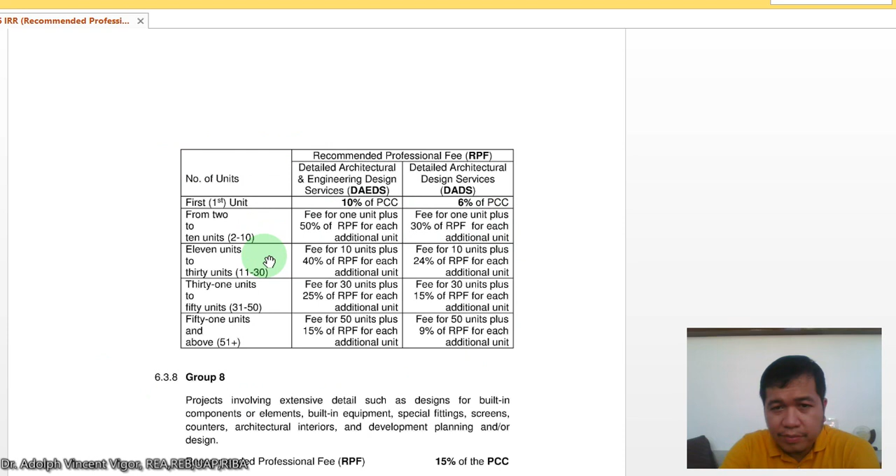Here for the different fees. Okay, so just take a screenshot of these, guys. So you can see that it's calibrated. So the more units that's going to be built, you'll get a smaller portion of your professional fee already.

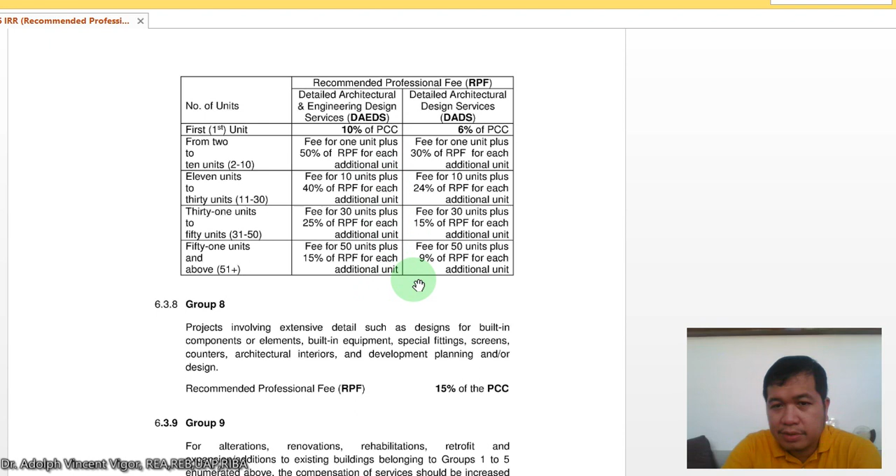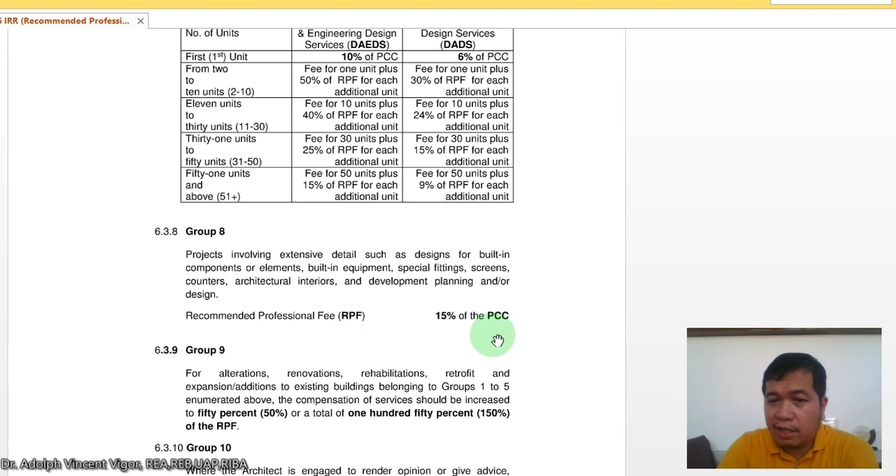So you have here group 8, which is projects involving extensive detail design for built-in components. You get 15% of the PCC if it's for the architectural interiors.

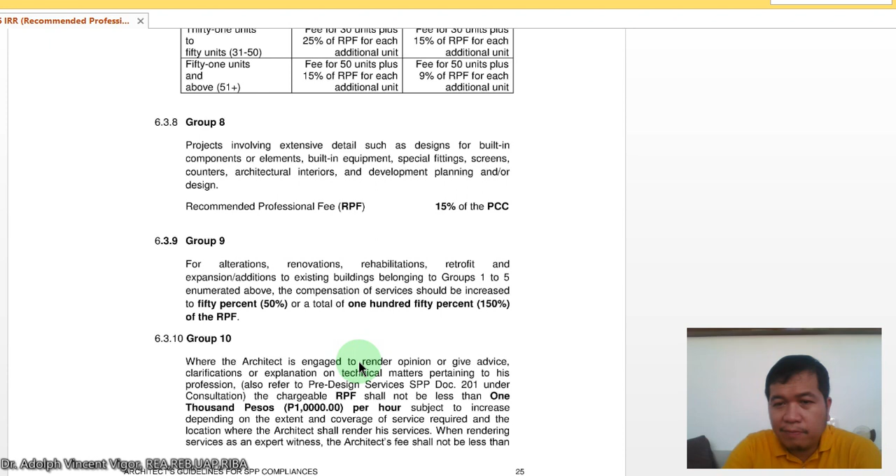And group 9, you're going to do alterations, renovations, retrofit. If any of the buildings from group 1 to 5, the compensation of services will be increased to 50%, or a total of 150% of the recommended professional fee.

Now, for group 10, so when the architect is engaged to render opinion or give advice, clarifications, or explanation of technical matters pertaining to his profession, the chargeable fee shall not be less than 1,000 pesos per hour. So that should be your charge. It could either increase that, but that's the minimum.

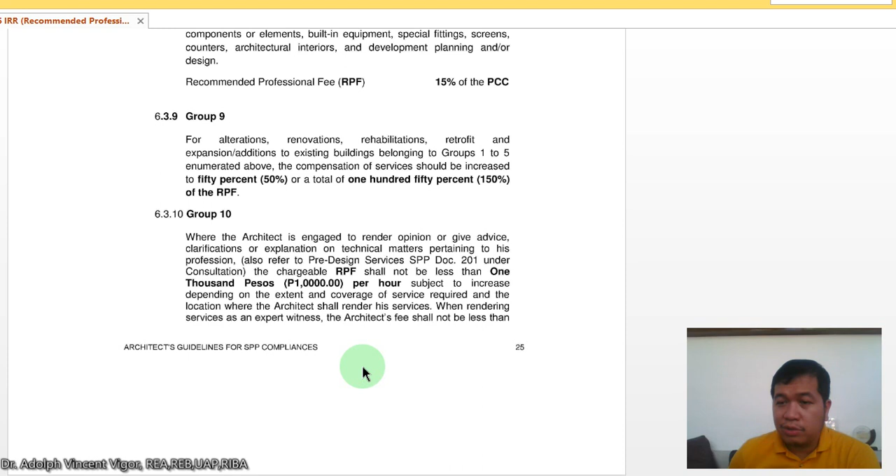As you can see, there are also lawyers who charge around 2,000 per hour. So it will really depend on you.